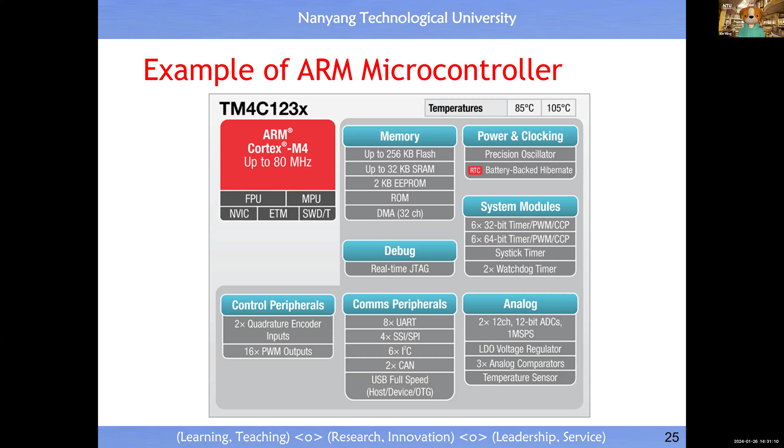Today, the typical example or most popular example of a microcontroller should be ARM, or Cortex MCV. M means microcontroller. Inside your handphone, you have an ARM ACV. A means application or advanced application. Sometimes you may have heard of ARM RCV, R means real-time application. So for us, it's MCV, or microcontroller. This is the most popular microcontroller for you to consider.

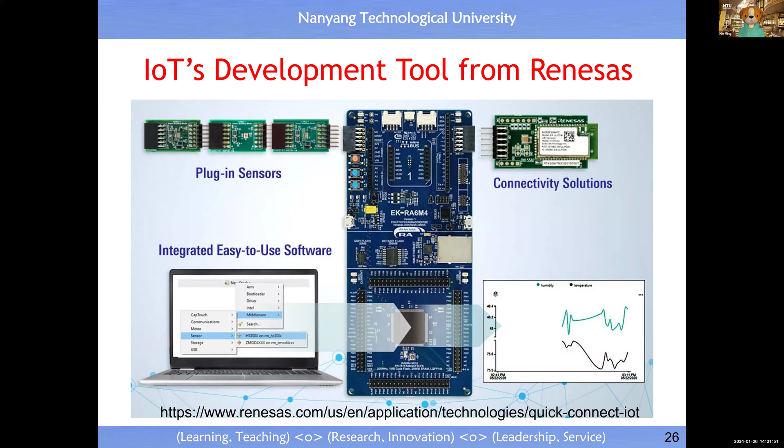Some of you ask this question: is there any dedicated platform for you to implement IoT applications? The answer is yes. You can use any microcontroller, you can develop your IoT prototype. If you want to have a dedicated solution or product, this is one example. I guess this company is also quite famous. So you see, you have a sensor and an actuator. You can plug in a sensor, plug in an actuator. Very, very simple.

So by now you know what is IoT. T specifically means sensor, actuator, microcontroller. Then, in the previous video, you already see that a car is a typical example of IoT, and I have also mentioned that the robot is a mini version of IoT. Then you may want to know, what else? How come IoT is so popular, so important?

Okay, now I just quickly go through some typical examples, beyond manufacturing, beyond robotics, etc. From this slide, immediately you see in the hospital environment, in healthcare, in smart city, in agriculture, in industrial automation, you know. Disaster, especially you see disaster management. Recently we see some earthquakes, and fires or something like that.

How to prevent all these disasters from occurring in the city or in the country? Only solution is IoT. But recently you see a fire, killed a lot of people. And why did such a thing happen? The answer is: there's no IoT. Immediately you understand. So in future, let's say if we impose that every building must have IoT, then you can prevent such an accident.

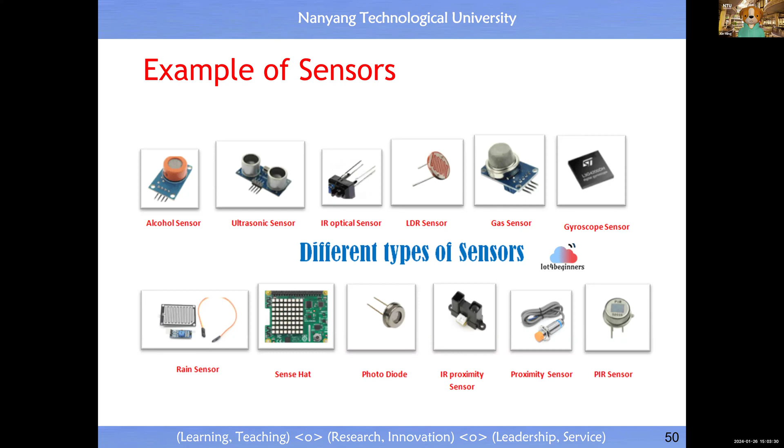Here is an example. We are going to do the study in one of the remaining sessions. We will cover this and give you some typical examples. This slide helps you understand that we have a whole range of sensors - this is the big family.

This helps you understand the sensor industry is very important - it's one of the pillars of economy in any country. But in the Chinese community, we do not pay attention to the small sensor, right? We always like the big sensor. This is a cultural characteristic of Chinese people. Paying attention to the small sensor may actually create big wealth for the country.

Then for actuators, it's the same - we have many types: electric actuator, hydraulic actuator, pneumatic actuator, etc. If you consider all cars and robots as a mega version of actuator, this is also a very big family. You can also treat all machines as a mega actuator - it's a big family.

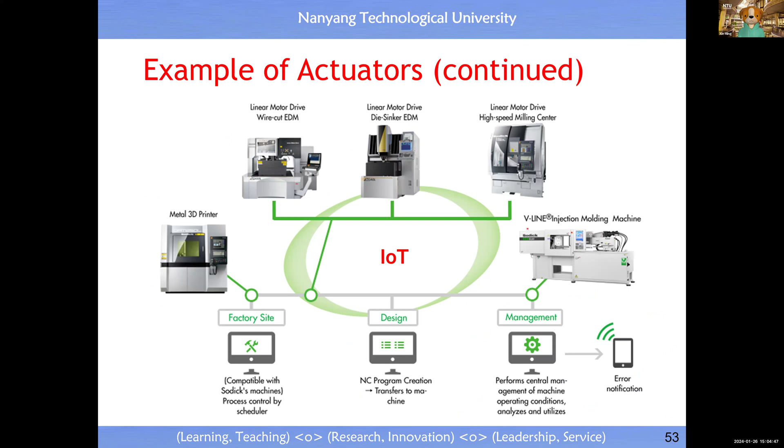So that gives you an idea about how to become professional in doing the design of an IoT product, an IoT system. It means you need to have a basic understanding about the sensor, basic understanding about the actuator, and basic understanding about the microcontroller.

So then you may want to know a little bit about the future challenges faced by microcontrollers. I guess one of them should be energy consumption, because eventually for some applications you may have a massive network of sensors, a massive network of actuators, and all these devices will consume energy. So one challenge is how to design low power consumption devices - if your sensor consumes a lot of energy, you are in big trouble, because you keep changing the power supply.

So it's a big headache. One interesting solution is to leverage renewable energy - why not use solar energy? That means you include another device: an energy harvesting device, like a small solar panel. So you consider that you have a sensor, an actuator, and also a renewable energy device to supply the energy. This is the solution for handling this number one challenge of power consumption.

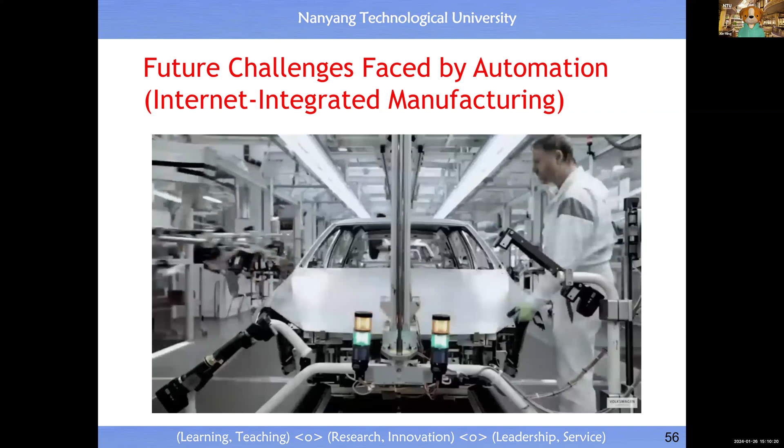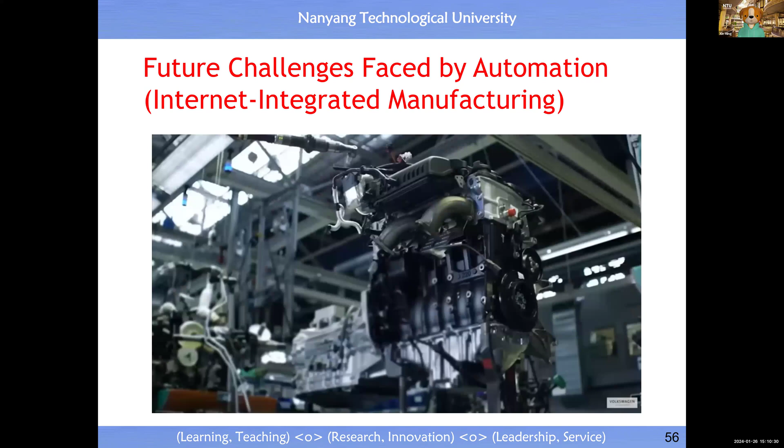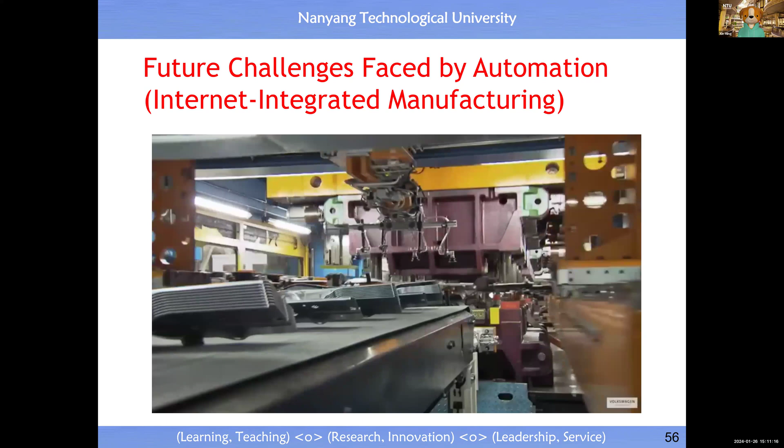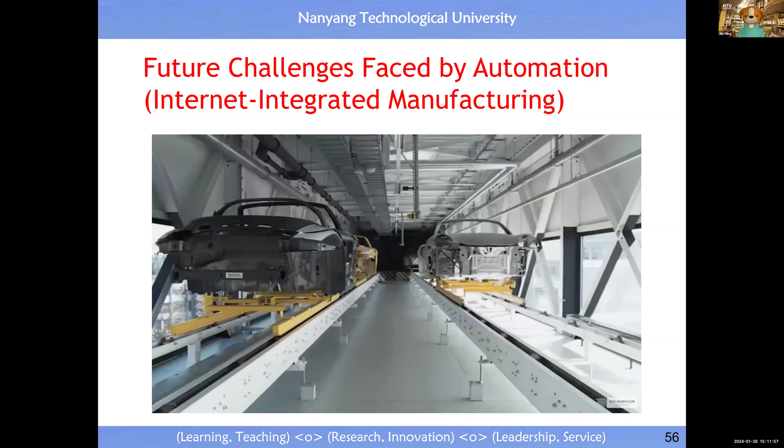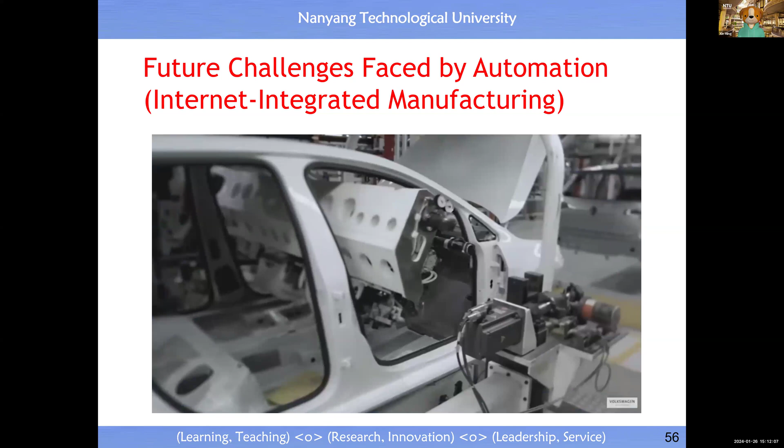Okay, so the previous one showed you a real example of the application of IoT in the automobile industry. Then you see a lot of robots and even retrieve information about all the cars, right? So eventually for each vehicle, you will know the identity of each individual car, who are the manufacturer, who are the supplier, all these things. So through the use of IoT, you have all the data, etc., right?

Then for how to achieve this Industry 5.0, you see still a lot of challenges. In order to replace a human being to achieve an unmanned factory, the remaining challenge is what? Strictly speaking, today's robot - in Chinese robot means what? Mechanic man, 就是什么？机器人，对不对？But you must think, is it full man or half man? Because human beings, we have skill, we have intelligence, yes. But today's robot, if you use this term, 机器人应该是半人是吧？Half man是什么？Because today's robot, they only have one motion.

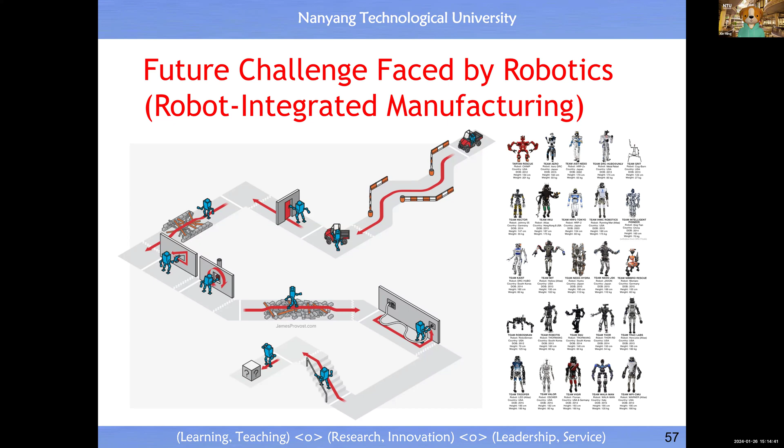How about intelligence? Alright, so this helps you understand the challenge faced by robotics. Strictly speaking, today we have 机器半人，应该这样讲，对不对？Right. So then, in order to achieve robot integrated manufacturing, the robot must match the performance of full capability, as close as possible, to a human being. Then you can call it 机器人, otherwise it's 机器半人, right? Half a human being mechanized, or half a mechanized human being, right? Clear? Okay, once you think about this, you immediately understand the remaining challenge is what? AI, right. Okay, so that's about lecture one.

So by now you know what a network system is, right? And you also know what IoT is. IoT is a network system in which the T refers to sensor, actuator, microcontroller, or eventually it's good to aid in the renewable energy device because energy supply is a big issue, right? And to handle security, I guess it's not a big issue, but you pay attention, okay, make sure your IoT is secure, right? Then you also know the wide range of applications of IoT. In future, everything is IoT - your building, your hospital, your restaurant, your agriculture, your industry, and your city, right? So everything is IoT. And then you know a little bit about the challenges faced by future IoT, right?

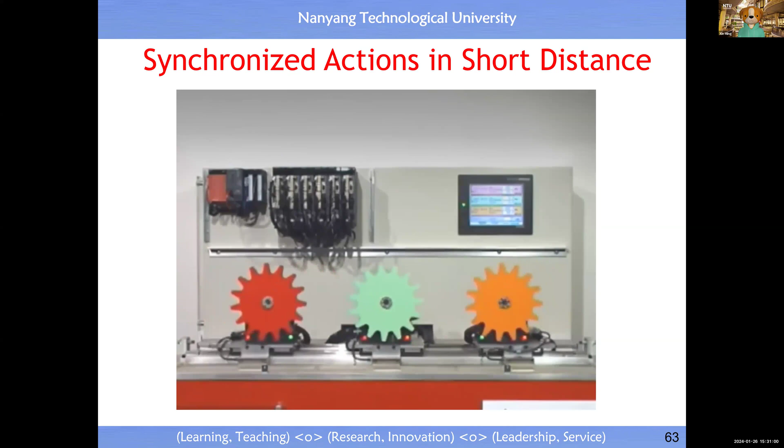Three of the amplifiers drive the linear servo axes, which are inline mounted Mitsubishi Electric LM series motors. The remaining three amplifiers drive Mitsubishi Electric HFAE rotary axes from the MRJ3 servo series. High resolution, absolute precision encoders on the rotary axis offer 262,144 pulses per revolution output. This allows for extremely accurate control over position, torque, and speed.

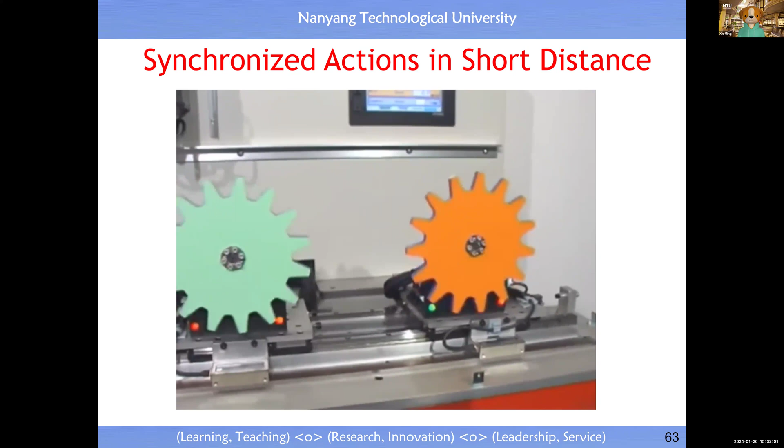Operator control and monitoring is provided by Mitsubishi Electric GT15 HMI, linked to the PLC through the bus on the back. It allows high-speed data transfer from the servo amplifiers to the HMI. The design of the MRJ3 series provides easy installation and configuration, regardless of the application. The control parameters are set automatically by the real-time auto-tuning system developed by Mitsubishi Electric. This function continually adjusts and optimizes the control parameters for the current operating conditions.

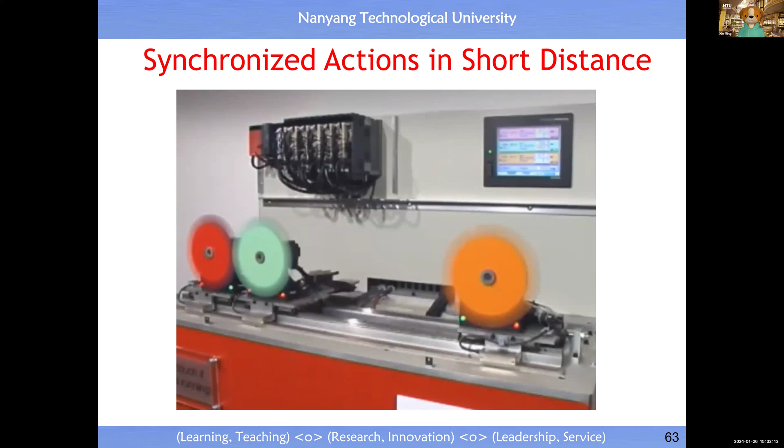Okay, so this is a very impressive demonstration. So now you understand - action has been synchronized, motion has been synchronized. How do we achieve synchronized motion? The answer is synchronized communication. Without synchronized communication, how are you going to achieve synchronized motion?

And then you see, high-speed motion is not the issue. So as long as we are able to synchronize data communication, then we can synchronize a lot of action. Like in that demonstration, you will see three motors must communicate data, otherwise how to synchronize? You must know each other, right? Then you may want to know how we achieve data communication among different devices.

One popular solution is to transmit the data bit by bit. For those of you without computer science or electronic engineering background, this is just for you to know. Digital data consists of bytes, yes or no? What is the basic unit of digital data? The answer is byte. How many bits inside one byte? The answer is 8 bits.

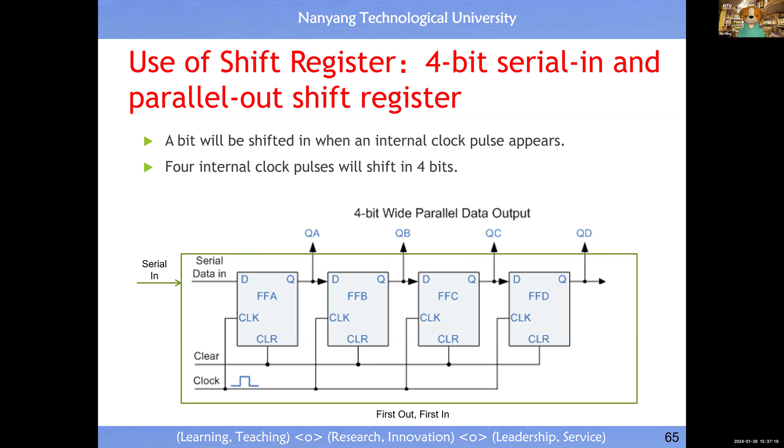If the output of this connects to the input of another shift register, then one side will shift out and another side will receive. Clear? So this is it. Then you put two 4-bits together, then you have one byte. This is the basic unit of data inside any digital computer.

Then for a 32-bit microcontroller, eventually it's not 8-bit, like 32-bit, right? So you have 4 bytes aligned together. That's it, conceptually it's not difficult. It's just for you to know.

So this helps you understand the operation, the synchronized operation inside a microcontroller. This helps you understand that one side transmits and the other side must receive. It's always in pairs. One guy is output, another guy must be input. Otherwise your data will go in the air and you are lost.

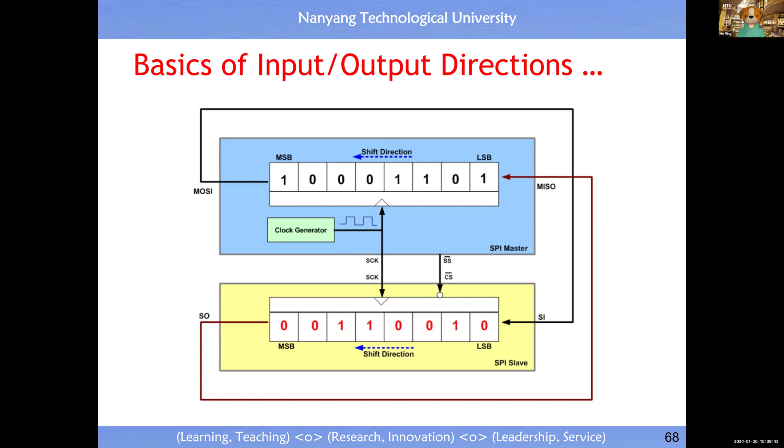Which follows the working principle of bit by bit. Bit by bit, we call it the serial communication principle. And then this is more detailed about the timing control.

Because when you send out the signal, this is another background knowledge. All the digital data consists of 0s and 1s, yes or no? The physical implementation of 0 means what? 0 volts. 1 means what? 5 volts. Okay, you understand this background knowledge.

Then in the data line, if let's say you make a transition from 0 volts to 5 volts, this transition takes time, physically it takes time. So this is why you see all this drawing, like the transition shown as a cross or something like that. So that indicates you need the...

Old, how come this guy... the main projector does not appear.

Okay, so basically it means you need to have a little bit of time for the data to stabilize. So how do you provide this time? You see, one clock has a positive pulse, a negative pulse, a certain duration each cycle, each clock signal. Each pulse has a duration, so we will play with this duration. Let's say, for example, when there's a transition from logic high to logic low, if we say in this case, it means what?

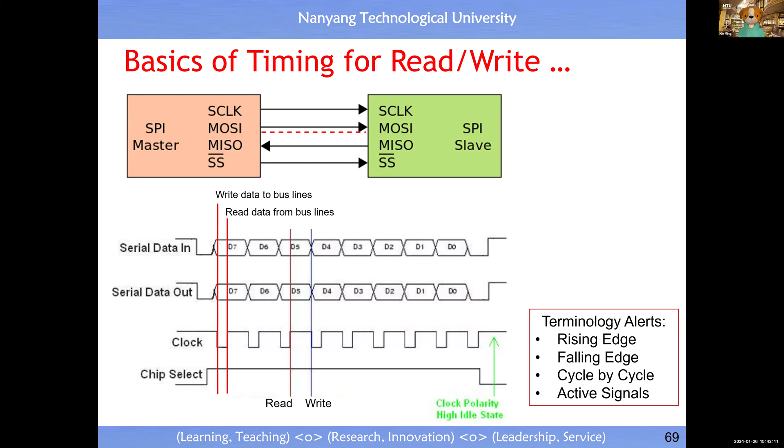Okay, so this is the illustration for you to see how to produce the pulses, etc. This is not a big deal. And then for data communication, this is just a typical scenario: you have a transmitter, you have a receiver.

Basically, you may have three types of communication scenarios. One is easier for you to understand: always in one direction, very easy, always start from A to B. For example, A is a sensor—it always outputs, it never receives any input. So this is one type of communication.

Second type: A and B, where A would sometimes be a transmitter, sometimes a receiver. They can change roles, but at each duration there's only one direction—one communication in one direction. This is the second scenario.

Third scenario: at any time you can undertake input or output independently. So a master device and slave device can do input and output in parallel.

So in this case, ask yourself: how many data lines do you need? If you have two devices that need to exchange data which could occur in parallel, input and output—how many lines? Two: one for A to output to B, another for B to output to A. And since data communication must synchronize, you need another dedicated line for synchronization. So the minimum number of wires should be three.

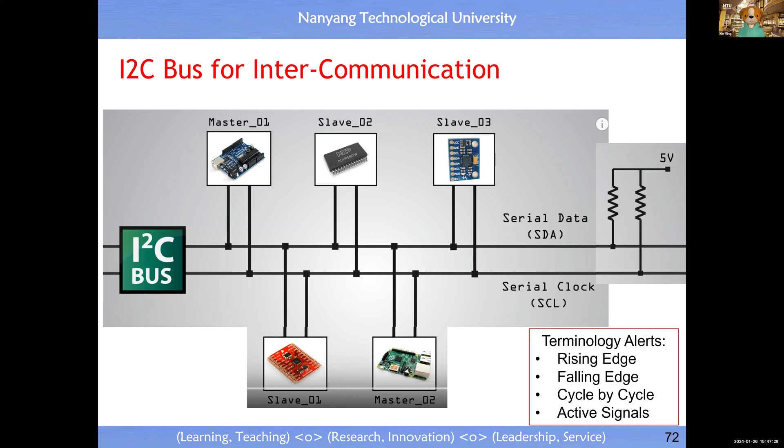The solution is, when you communicate a series of bits in one session, you must keep the address information. What do we mean by address? It's the ID of the receiver. Now you see device address, and then eventually you can tell the receiver where to put this data.

After that, you only send out the data. In one session, it's not just one bit, you communicate 32 bits. The first bit has a certain meaning, the second bit has another meaning, and the last bit should be the data. So this is the called data framing.

It's kind of an encoding. This can help you to know. So this is the I2C protocol. But you can invent your own way, your own protocol. There's one session, I communicate a packet, up to you. Among all this, what is the meaning of each part? It's up to you. Try to be flexible. You are able to invent your own protocol, so try to be flexible.

Based on this background knowledge, look at how to achieve serial input. You have an output. In this connection, you will see master input, slave output, or master output. MO means master output, then slave is the input. MI means when master is the input, slave is output, SO - slave output, master input. When you do the hardware connection and wiring, you must follow this connection.

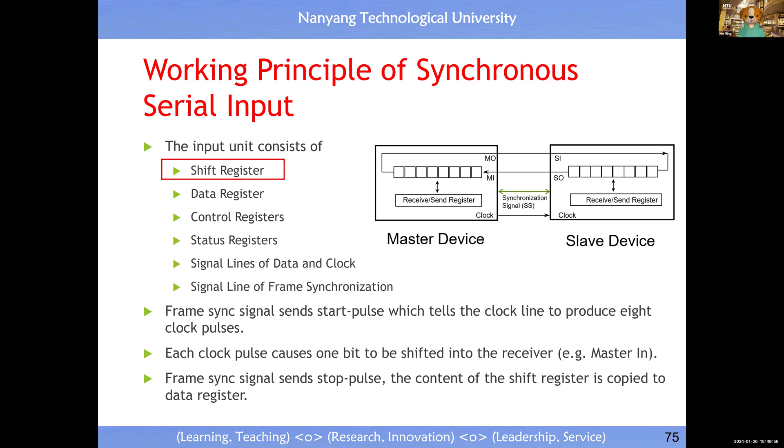You also have a clock signal. The clock can come from master or from slave, that's no matter. Once you do this connection, internally you write one byte into the shift register. Then the hardware will issue a clock pulse, and one byte will shift out. That's the working principle. You understand how to communicate one byte, but if you continue to send out three bytes, then this is the I2C protocol.

You don't need to worry because all the microcontrollers have a built-in implementation. You just need to know how to use it, because when you use it, you understand why you must use it this way. You can visualize internally what's going on. But you may say, hey, how come there's an additional cable?

That is an additional signal to indicate you are going to undertake one session of communication - additional control. So within this one session, eventually you just communicate like I2C. That gives you design flexibility.

Now you see the SCK is a clock signal - a regular pulse, which you can interpret as a heartbeat. Every digital system must have a heartbeat. For each pulse, you have a falling edge, rising edge, logical low, logical high, something like that. Each transition is how we trigger an action.

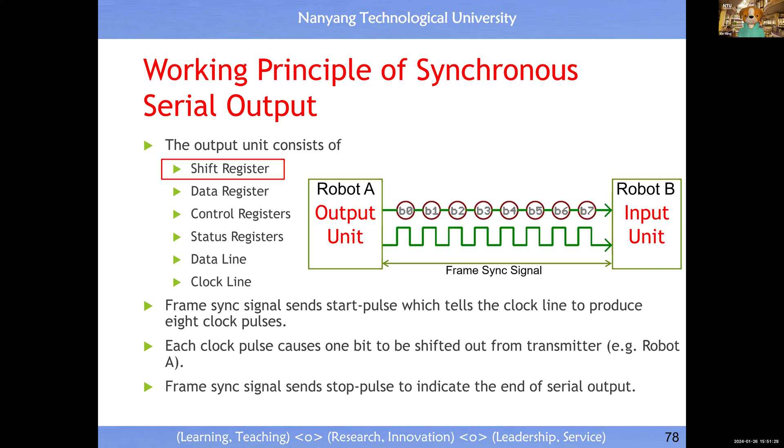This is a symmetric clock. To output something means when one clock appears, the output device just sends out one bit - it's a shift register, symmetric operation. So in this case, master output slave input, or slave output master input, it's always symmetric - they exchange bits with each other.

So that's about the working principle of synchronous serial communication. Good news is you don't implement all this working principle yourself, because you can buy a microcontroller with the built-in implementation. Then your role is to behave like a user, knowing how to use it. With low cost, you purchase this Cortex M4 and actually get a very, very powerful microcontroller.

Why do we use a microcontroller? This helps you know the answer - you can use a microcontroller to serve as hardware inside the control loop. In section 2, we studied control theory, so how are we going to implement those PID controllers, lead-lag compensators? Inside the microcontroller. So the microcontroller could serve as a controller, but in today's session, the microcontroller serves as a node of communication, for us to build up a network of communication.

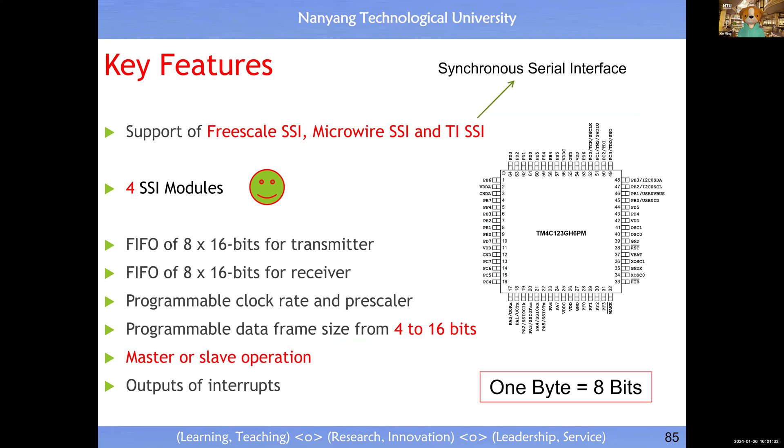Okay, clear. Then it's a similar situation for the hardware configuration - just for you to know the physical connection. You see the chip itself has a pin count of 64 pins. What do we mean by the pin? Then you look at this table.

So another background knowledge for you to know is port input output. For ARM Cortex, you have 6 ports, each port has pins, meaning one port corresponds to one byte. So ARM Cortex M4 has 6 ports, port A, port B, all the way to port F. It's very powerful - you can eventually connect to many external devices.

This is for you to determine the frequency of the clock for data communication. But you should not ask how come you use this formula - this is determined by the designer, you just use this formula. As a user, you need to provide a value for this prescaler.

This SSICPSR is the name of the register - you need to choose a number from 2 to 254. You also need to write the number to this SSICR0 register. Once you, as the designer or user, choose any number and put it inside, the hardware will compute the actual frequency of the clock.

Then you might ask why do it this way - don't ask questions, because it's like when you buy a car, you should not ask how come this operation is installed here. You just follow the design solution. But if you go through this example, you'll roughly know how to use this formula to do the configuration.

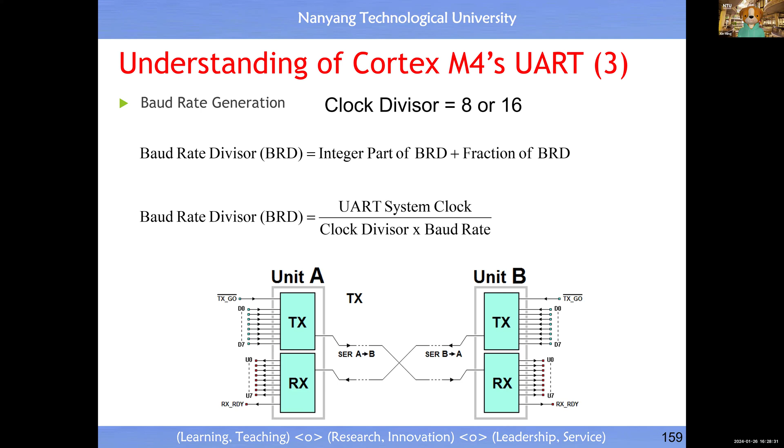You should not ask why we use this to determine the baud rate, right? Just follow this, okay? The hardware will know. As long as unit A and unit B are configured in the same way in terms of communication speed, they can synchronize, okay?

So then how to determine the value in this register? You follow this formula given to you, and I guess you have an example here. Go through this and you will understand how to determine the value inside these two registers.

That's it. So to operate this hardware, this built-in solution of asynchronous serial communication, as a user you always do the same thing: configure input, configure internal process, configure output, run. How to run? You just monitor the status register. How to configure input, internal process, output? Use the control register. The guideline for you to behave like a user is always the same. As long as you work in this way, it's much easier, right?

So here I'll quickly go through how to configure input for ARM Cortex. You need to determine your data frame: start bit, how many stop bits, whether you use a parity bit or not, and also the size of your data - the size of your byte could be 5 bit or 8 bit. You must tell the length of the word - word means generally the size of the byte, etc.